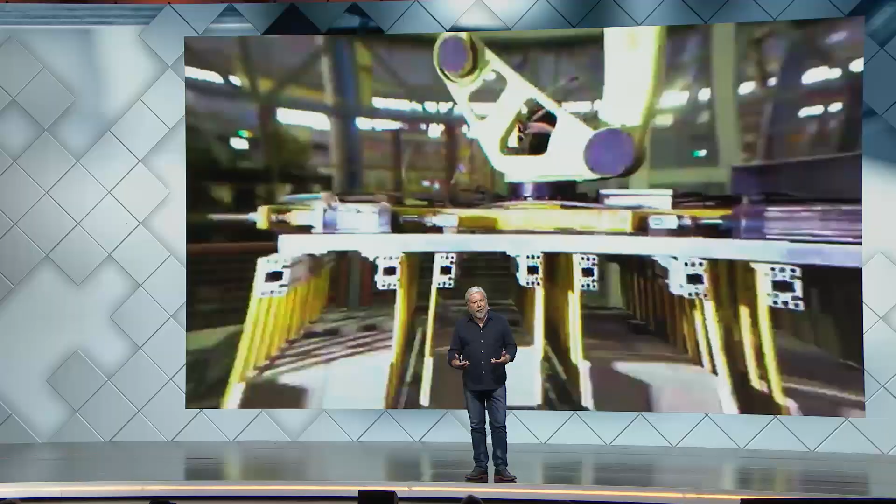Okay, let's talk about augmented manufacturing. What I want to tell you is that we have an incredible place in Ventura called XponentialWorks, where we are actually making the future of manufacturing through investments in next generation robotics, AI, and additive manufacturing. We just took the advice from Peter that the best way to predict the future is to try and make it. So we're putting our own experience and financial resources to work trying to make a difference. We'll talk about that a little bit.

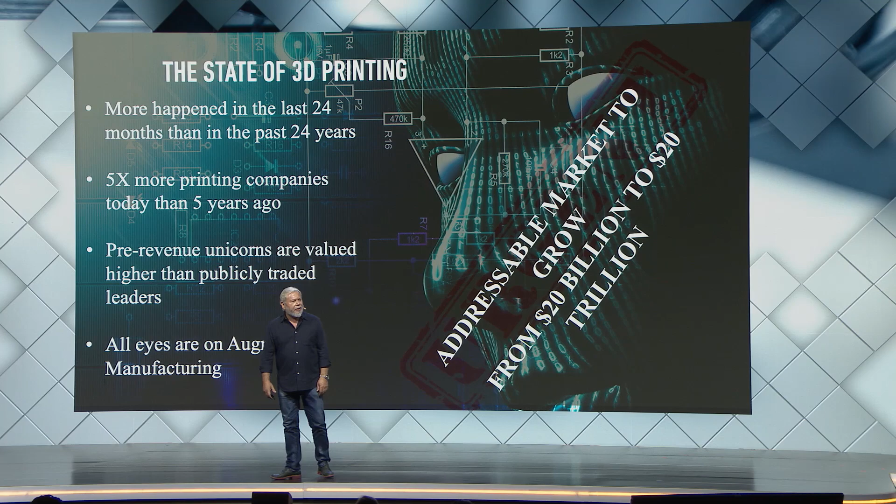But what's the big deal about augmented manufacturing? After all, 3D printing has been around for 4 decades. You know, it's not an overnight success. It's been around for a long time. But in fact, more has happened in this space in the last 24 months than in the last 24 years.

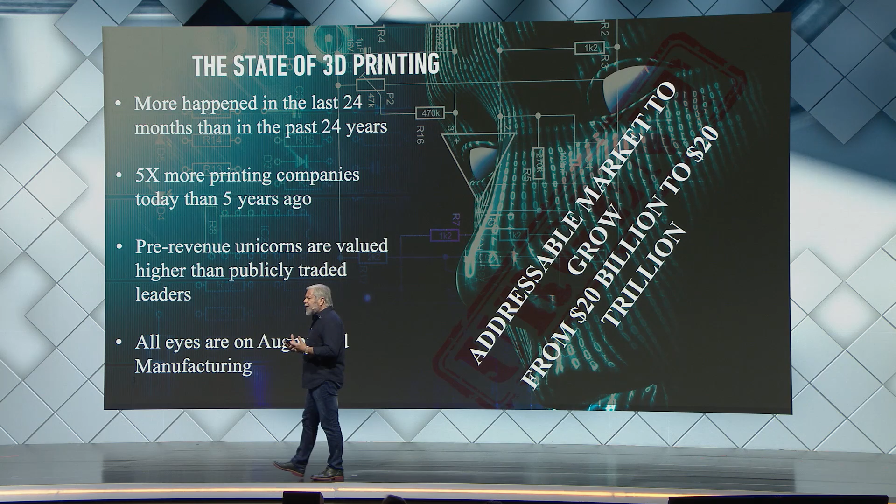There are 5 times more 3D printing companies today than 5 years ago. And there is a very interesting phenomenon: while the publicly traded companies in this space, my former company included, are rising in valuations at the moment, reflecting a recovery and accelerated adoption in manufacturing, if you look at the cumulative valuation of the early stage, pre-revenue, and modest revenue companies, cumulatively they boast a higher valuation than all the public companies combined.

Why is that? The answer is that all eyes are on real manufacturing, what I call augmented manufacturing, in many different fields. And because the size of the prize, the TAM, the total addressable market, is poised to increase from about 20 billion of actual revenue in the next 2 years to a TAM of about 20 trillion, which represents all the opportunities in manufacturing, in personalized healthcare, and other industries that we'll talk about.

So when we think about what augmented manufacturing is today, we think first and foremost about the input, which has undergone a significant disruptive transformation, and that's design. We're in a stage in which we're going from design to generative design, computer-generated design. 3D printing has been disrupted entirely in the last few years, and we'll talk about some of the core movements and their impact.

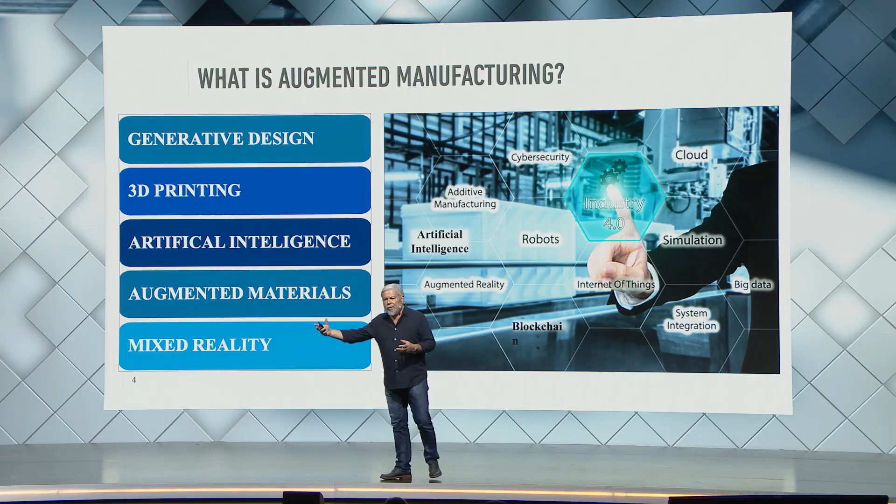Artificial intelligence, of course, and its applications from design to manufacturing, digital twinning, and quality play a big part here. And the mixed reality of design guidance, but also maintenance, repair, intelligent service, all coming into play. And as Peter loves to say, the convergence of this technology creates new possibilities. Make no mistake about it, in the next decade, fortunes will be made and lost with this technology, and not necessarily just by the companies that are commercializing, demonetizing, and democratizing, but by all the businesses that will be created, transformed, disrupted, and fail.

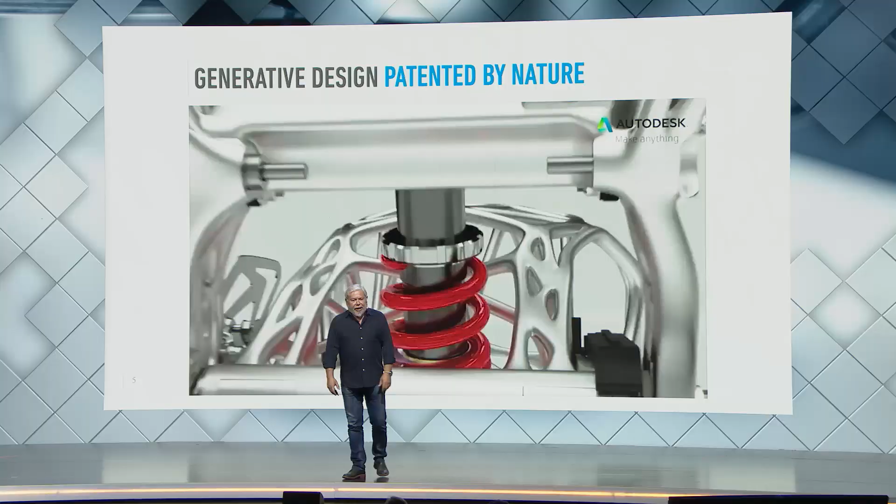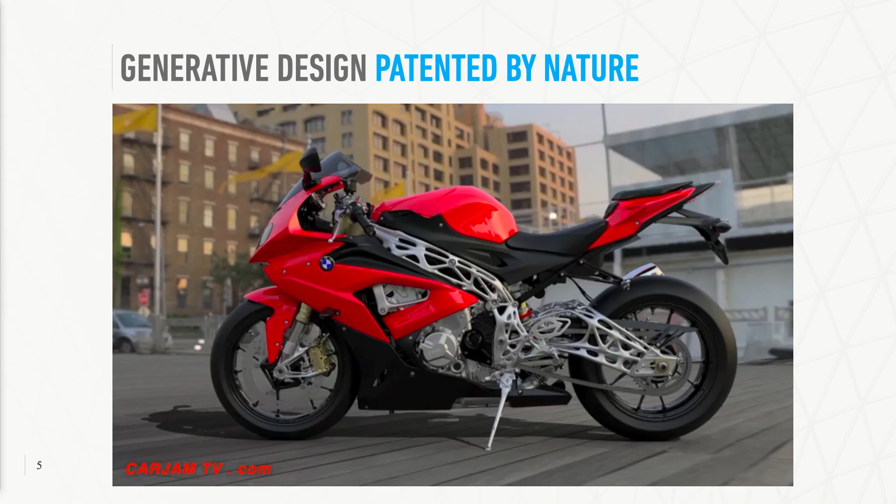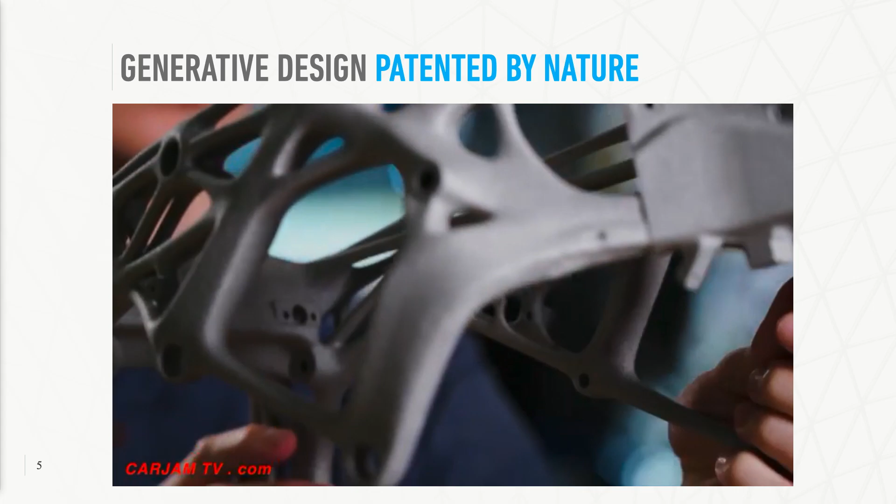Let's start with generative design, one of the most exciting developments with infinite computing in the cloud and ubiquitous connectivity. Computers can design. When computers can design, they can use algorithms taken from nature's playbook, because the most interesting structures in the world were already patented by nature. When you can lightweight, you can save money, increase sustainability, consume less energy, be more efficient, and increase function.

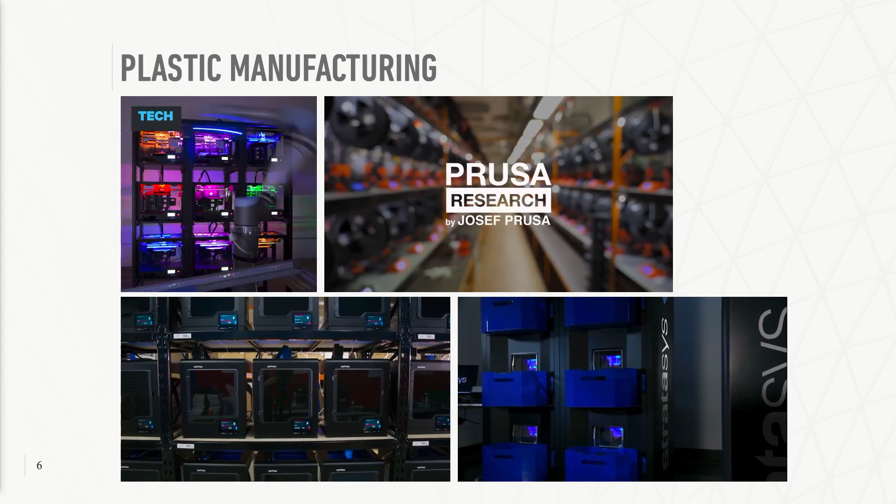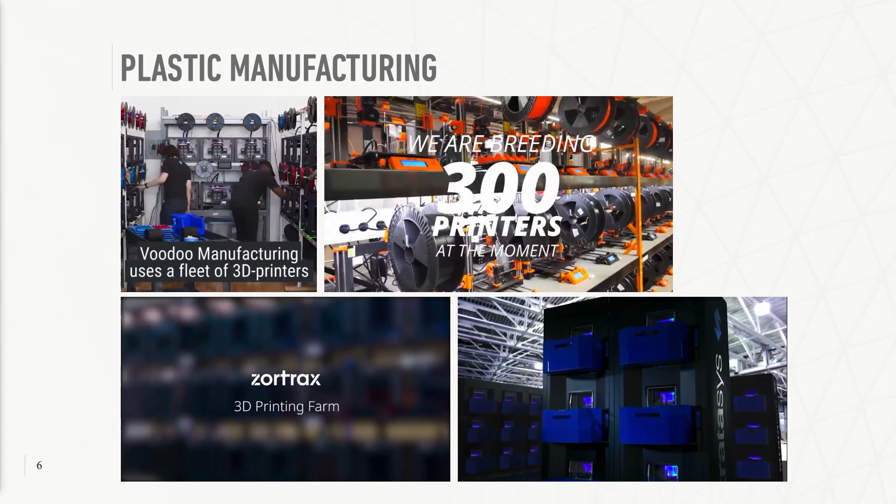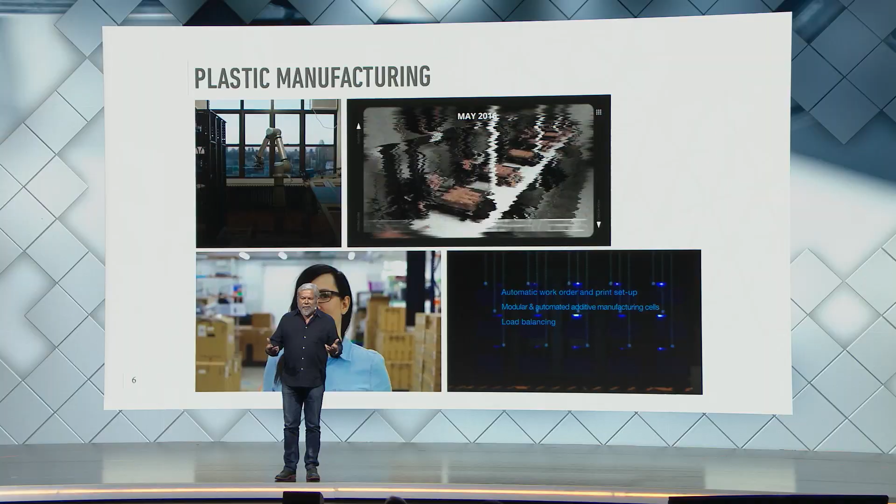The manufacturing side of it has some interesting applications and some limitations, okay? The interesting applications are taking really inexpensive plastic 3D printers and putting them into banks to create instant, low-volume, completely flexible manufacturing. It's good as far as it goes, and it can get you to some small enterprise manufacturing, but it's not really a scalable or reliable solution.

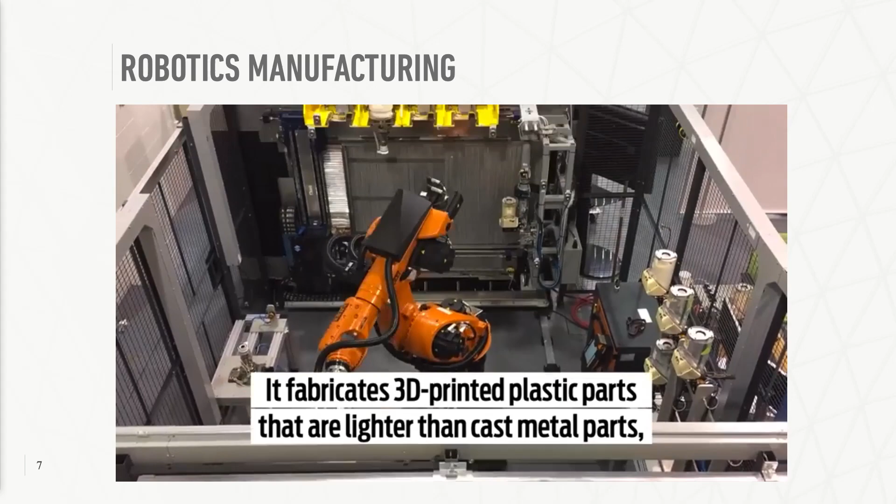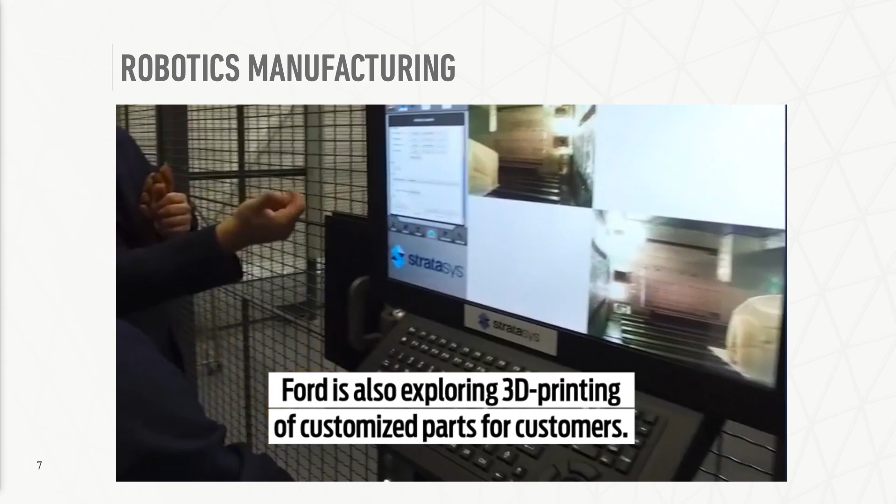Some companies are integrating robotics. You heard from my good friend Rob Nail that robotics are becoming ubiquitous and inexpensive. You can see a nice reduction to practice here of companies integrating robotics to build bigger size parts, used for spare parts or for exotic automobiles. It's an interesting niche, and it has its limitations.

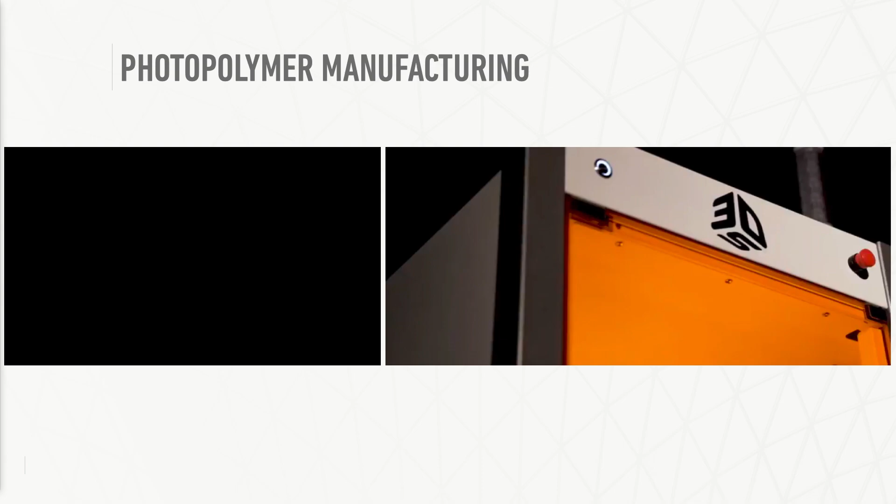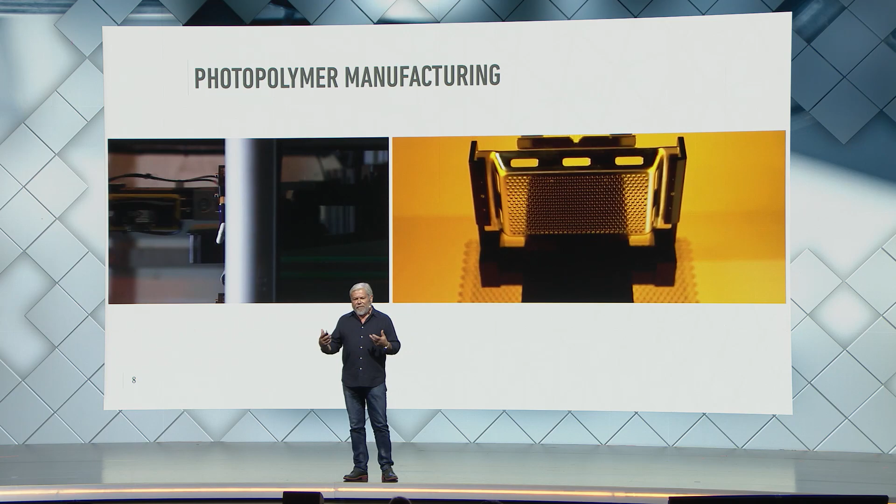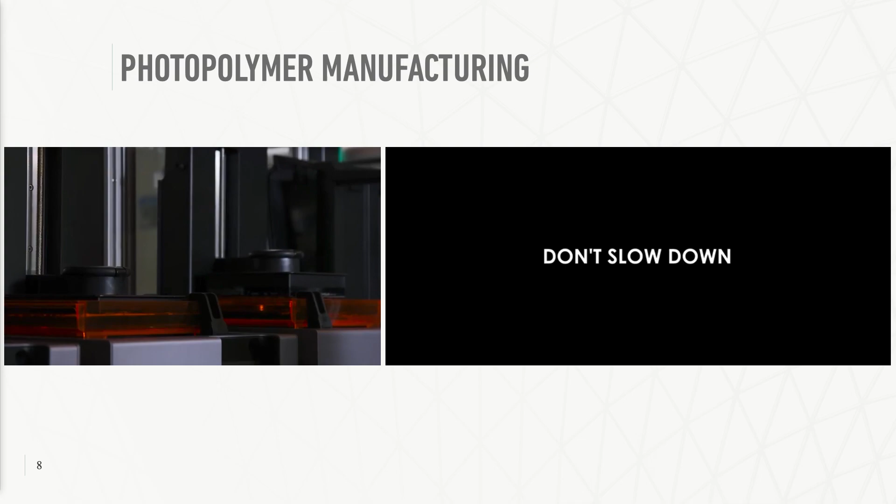One of the kind of killer apps that are coming is the use of digital materials and new chemistries in what's called faster continuous building. You can see some examples here from my former company, 3D Systems, and from another very successful unicorn, Formlabs, where they are integrating robotics with photo-curable materials to make plastic parts.

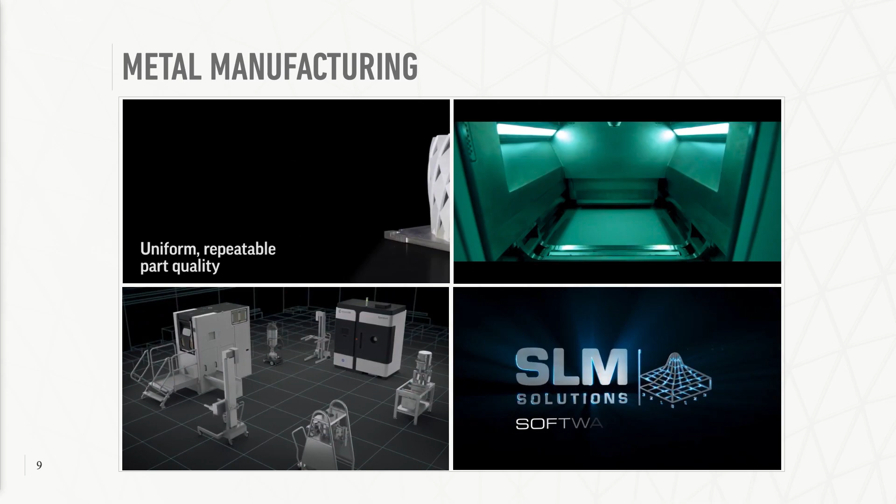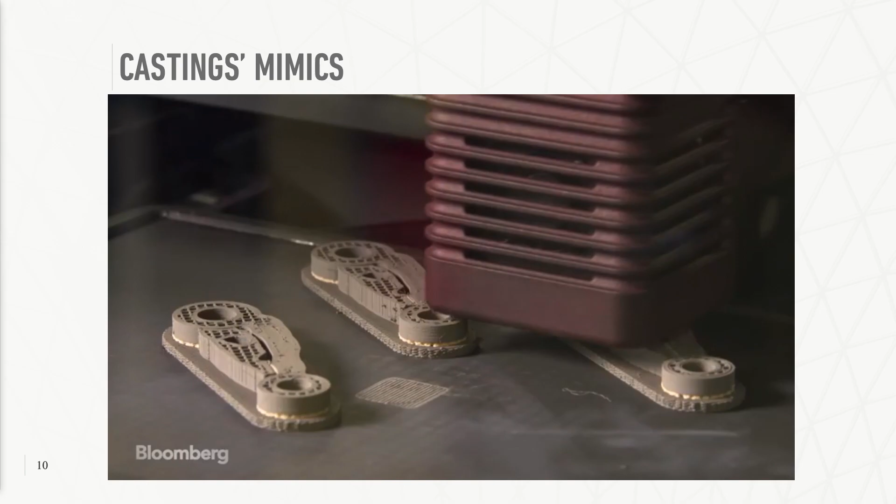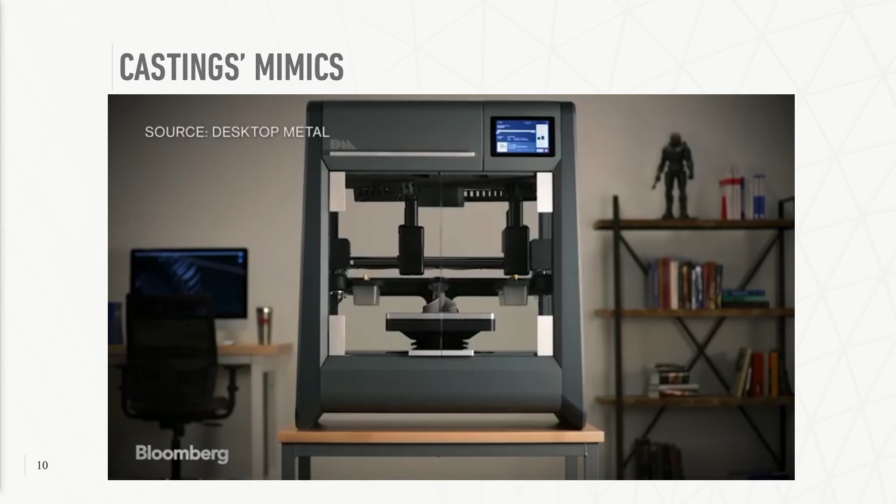Metal is the hottest space here because with metal you can laser melt real alloys and make real metal parts. There has been more investment and more deployment in automotive and aerospace in the last 2 years than in the last 20 years. And there are even interesting casting mimics in which you can use binder to bind together metal powders and then sinter them. And that could be used to begin to replace and displace castings.

And that's another interesting unicorn that Ric Fulop is running called Desktop Metal that already raised in excess of $300 million and is worth probably nearly $2 billion today as largely a pre-revenue company. There are interesting companies that are taking what Ric Fulop is doing to the next level. This is an Israeli company that is actually claiming that they can jet liquid metals and ceramics, which means they can get to higher resolutions and accuracies.

And with all the capabilities in making metal and plastic parts, what about electronics? What about making the parts functional and smart? We're going to have about 50 billion connected devices on the market in the next couple of years. They will all require antennas and sensors and encapsulation, and companies like Nano Dimension are solving for that problem.

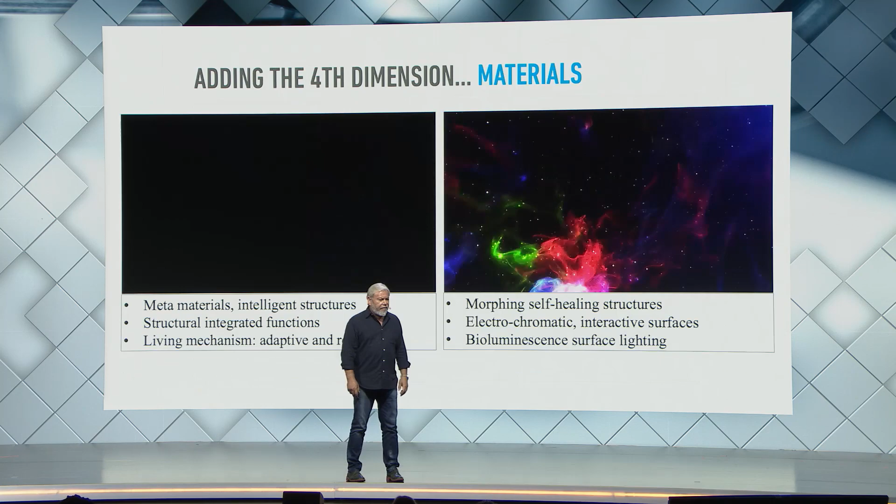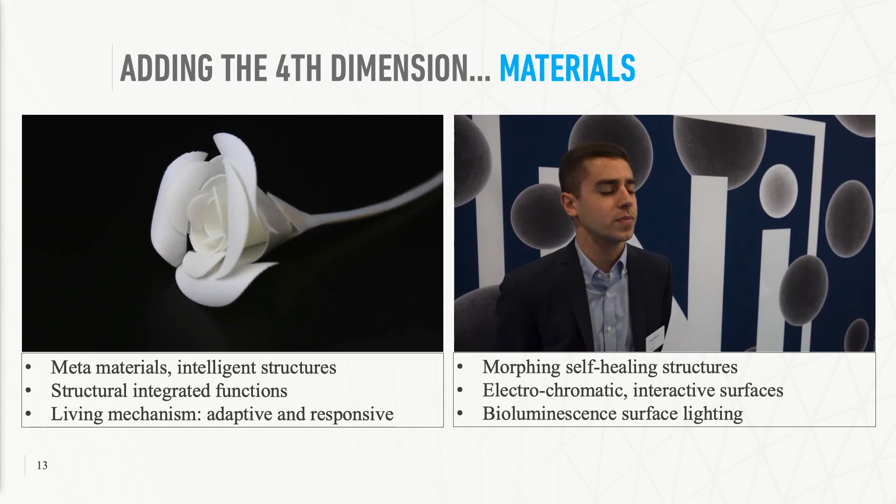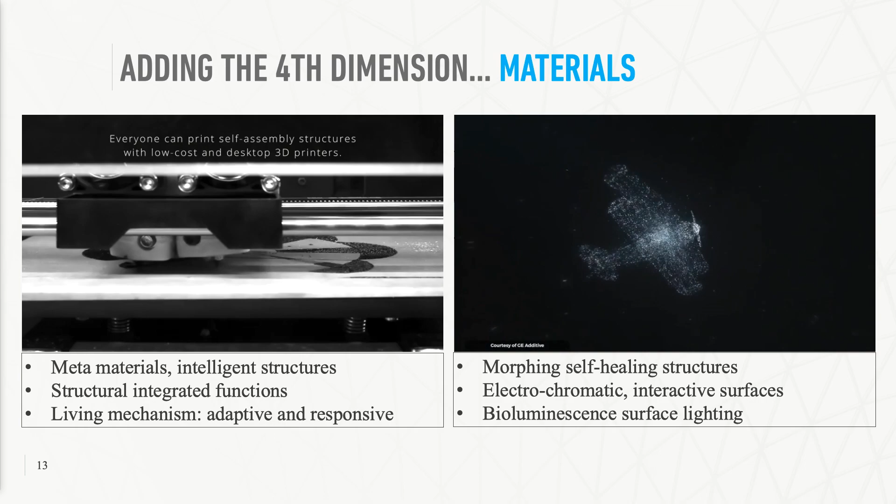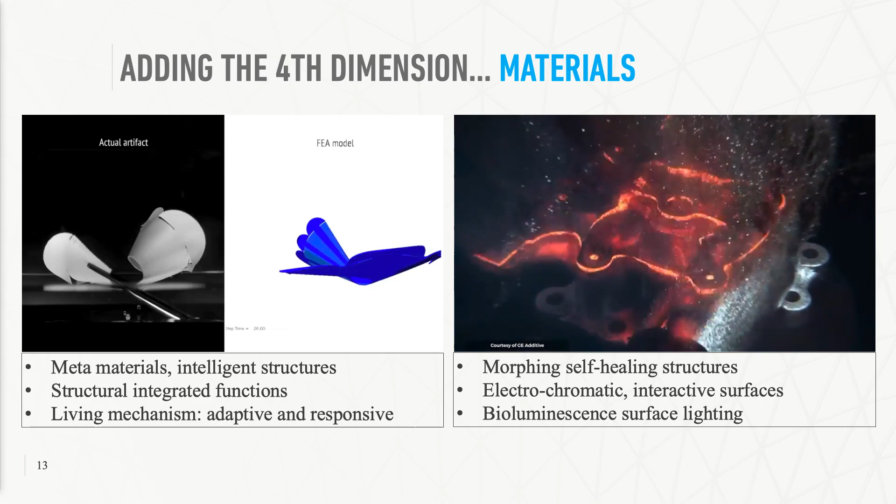And finally, we have the whole material science side of it, which is exploding in terms of functionality. We can already print today with metamaterials, with intelligent structures. We see a line of sight to self-healing and self-compiling or self-assembly of materials using 4D printing. And of course, there is a whole field of electrochromatic and interactive surfaces, which will completely redefine how products are made and designed.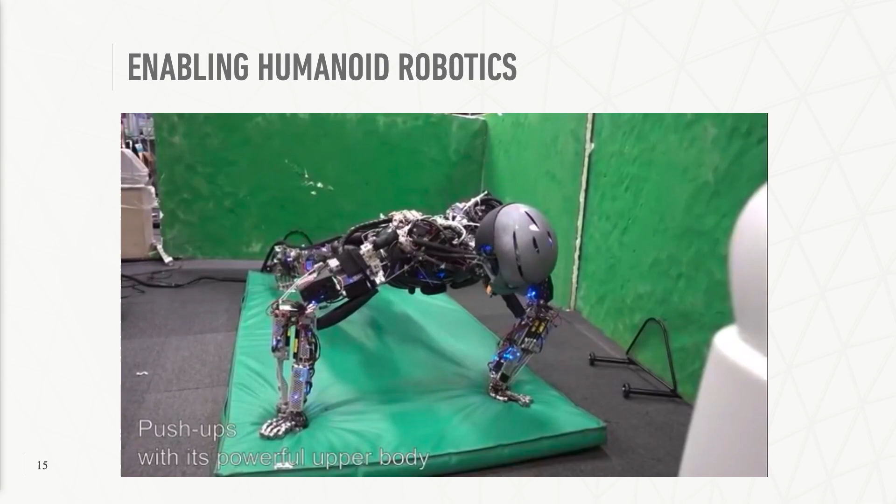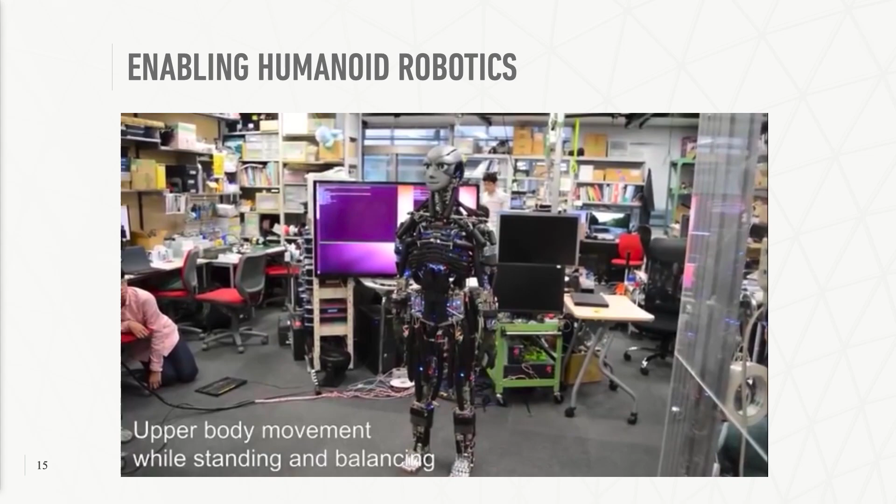So what's ahead? What's coming? What's in front of us? First and foremost, in the next 5 to 10 years, we will be printing convincingly not only robotic mimics, but we will print organs, and we will print bones, and we will have the spare parts to go with the kind of longevity that Bob Hariri is promising. And you can see the beginning of how materials and robotics are coming together to give us a humanoid-like functionality in ways that truly mimics the gestures, the utility, and the functionality.

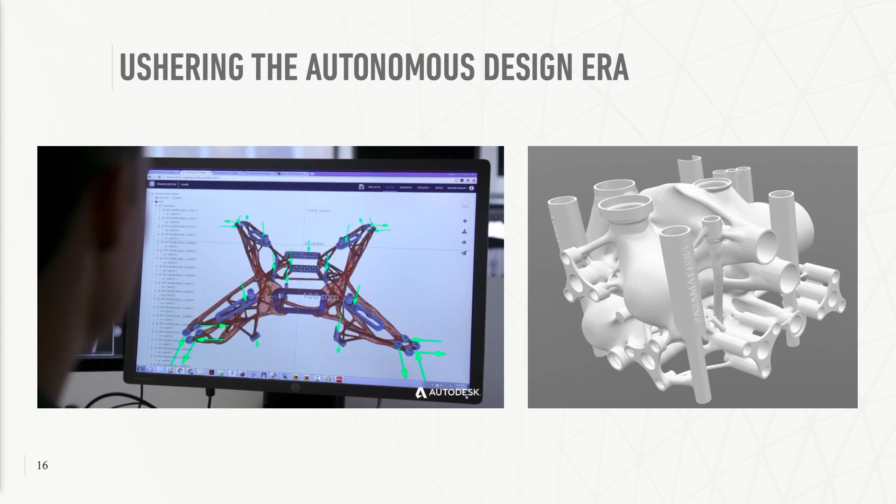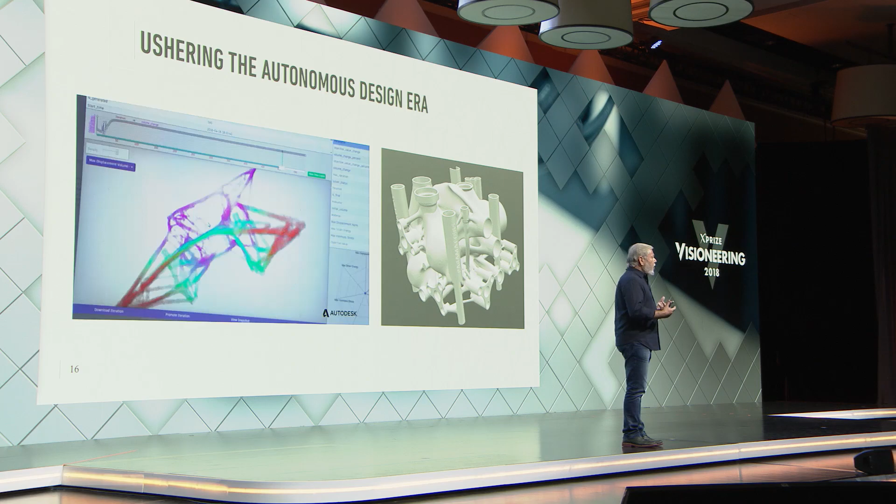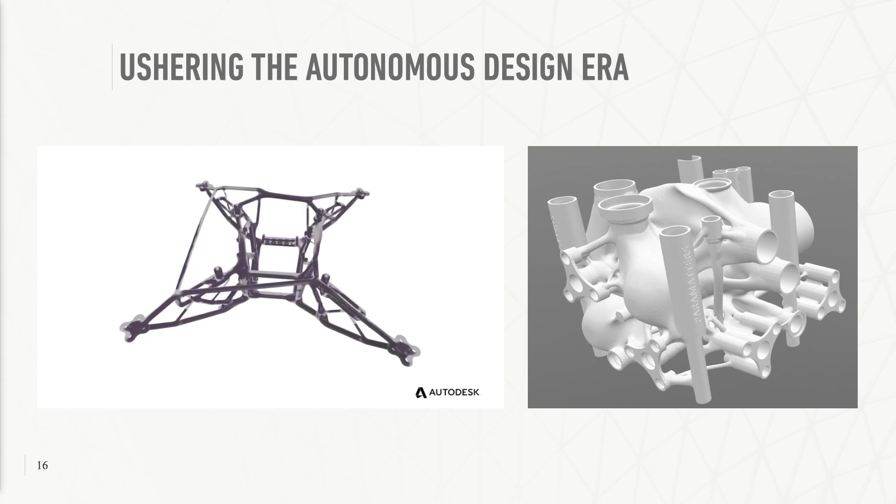The biggest breakthrough to me is the era of the autonomous designer. We now have interfaces in our labs in which I can talk to a computer. She is my personal designer, my AI designer, and I can change and morph parts, optimize them, and lightweight them in real time.

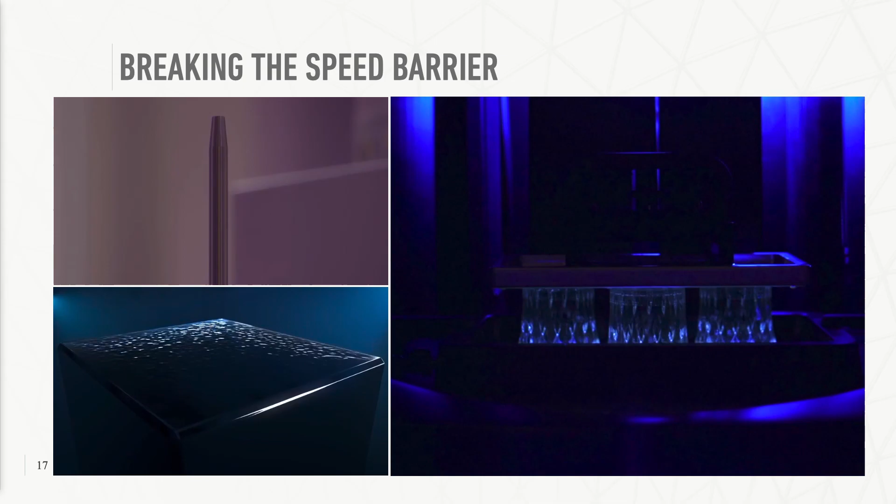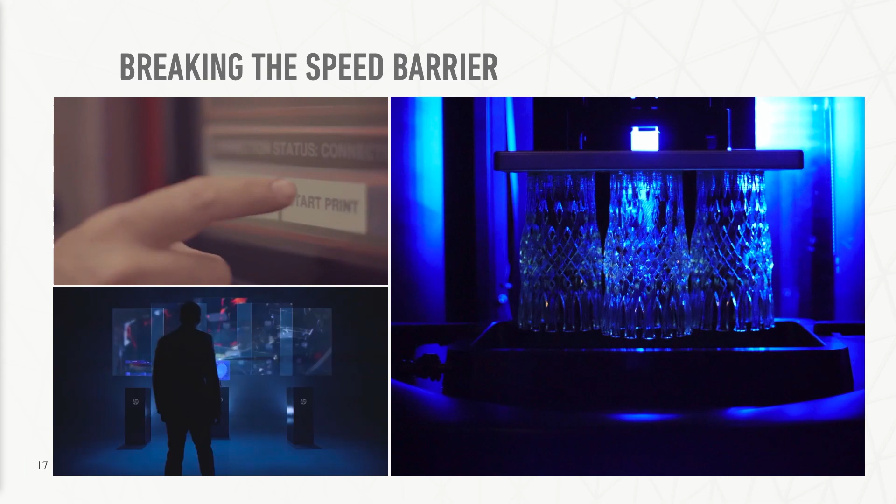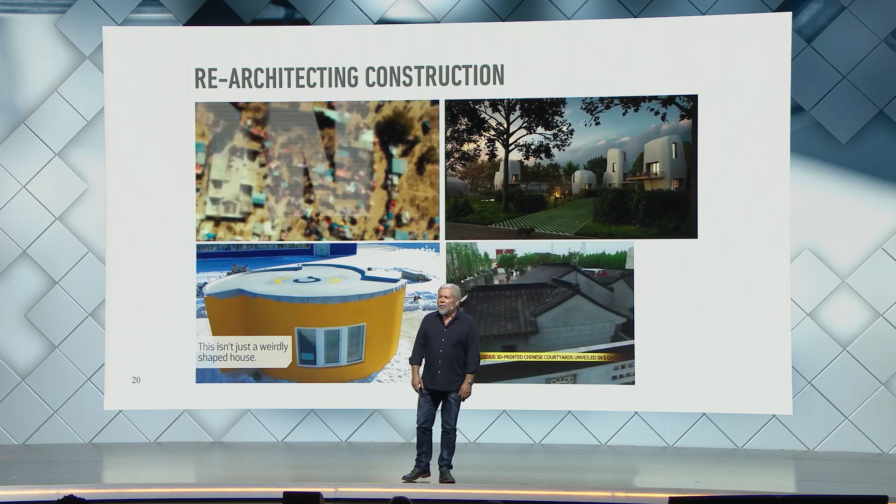Supply chain will be interrupted because Peter is talking about replicating. I think about teleporting. When you can teleport matter, it has no borders. So UPS and FedEx, watch out. Trump, rethink your trade war strategy because there are no borders to cross here. Architecture and construction will be reimagined.

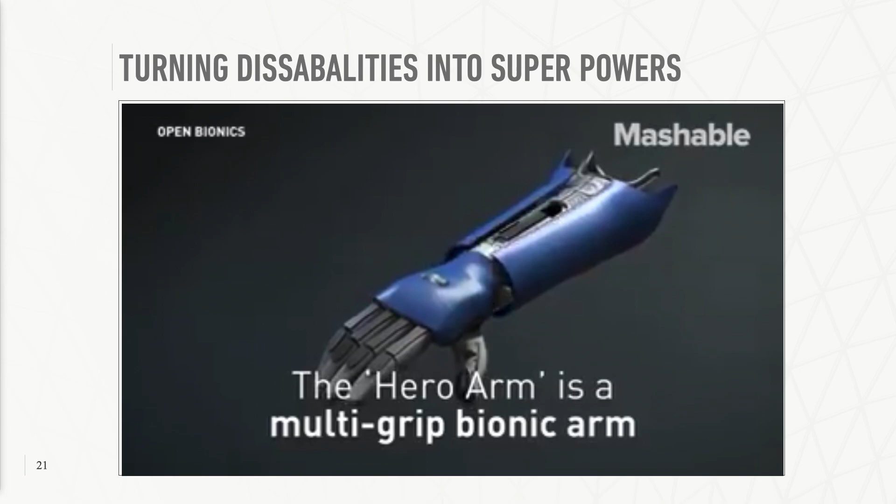Disabilities will turn into superpowers through the combination of AI, sensing, and robotics in a way that will be so powerful and so compelling that some fully functional and able people might want to augment and enhance their functionality.

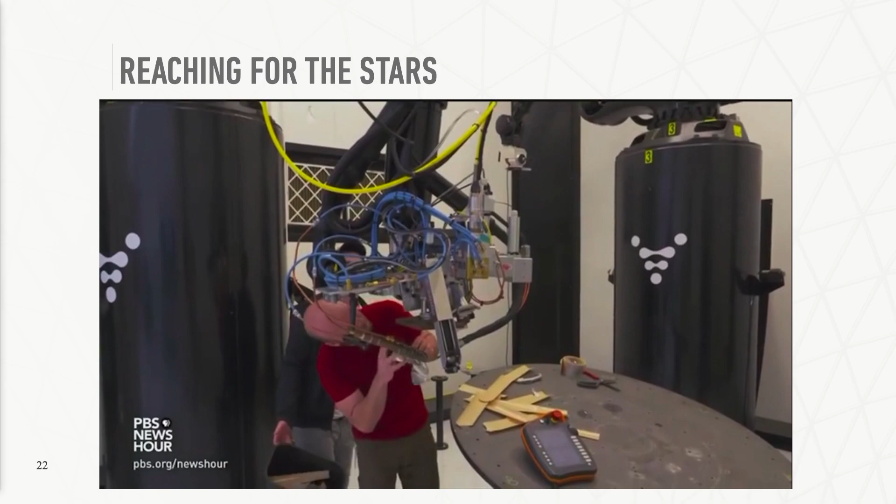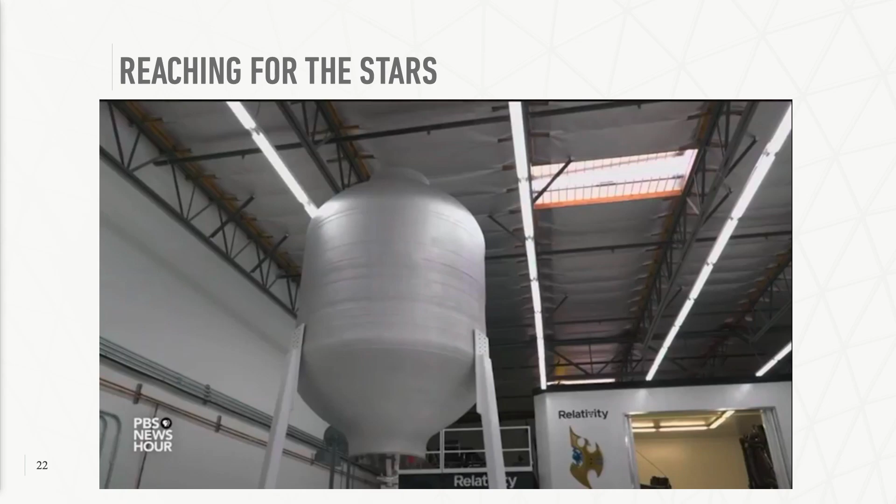And down the road here by LAX, there is a new company called Relativity that is building rockets to deploy satellites into space by combining thousands of parts into few and by 3D printing the entire engine, rocket, and fuel tank. They've already had 85 successful trials.

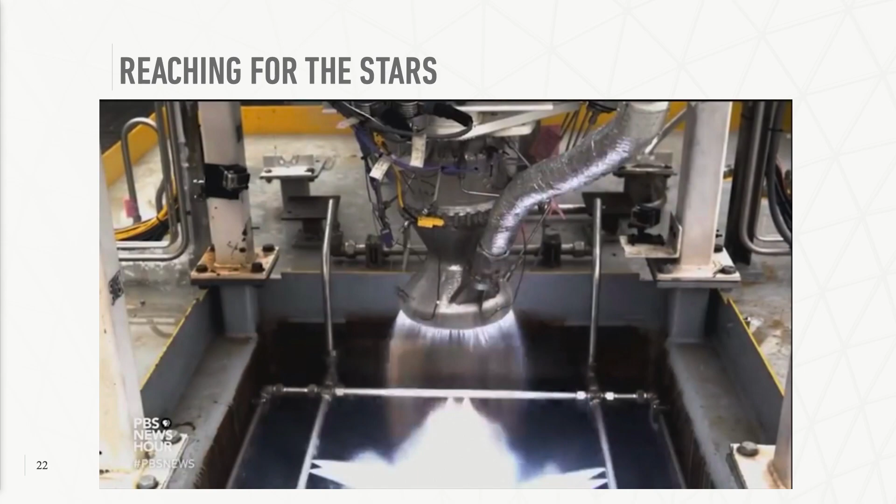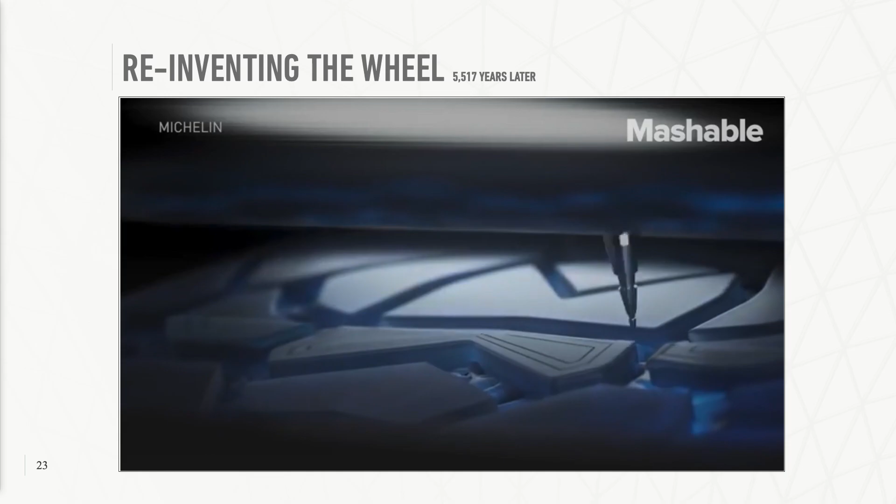And yes, my fellow Visioneers, after some 5,500 years, even the wheel is being reinvented. Every tire company around the world is racing to take a page out of nature's playbook and completely reinvent the wheel. So I'm going to leave you with this. There has never been a more exciting time to be in 3D printing. This is now. It's here. It's going to be huge, except maybe for next year.

Thank you very much. Every time I hear you, and every time I see you, besides just... Do you like our fashion consultant? I'm blown away by the potential.

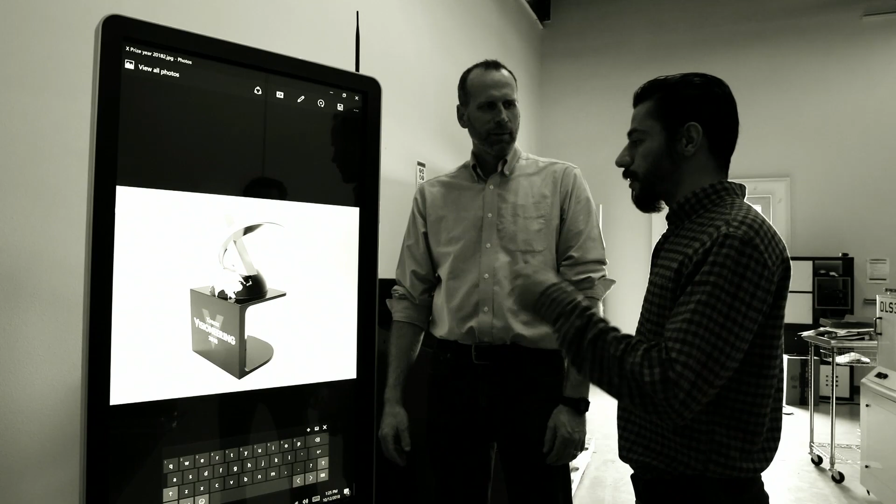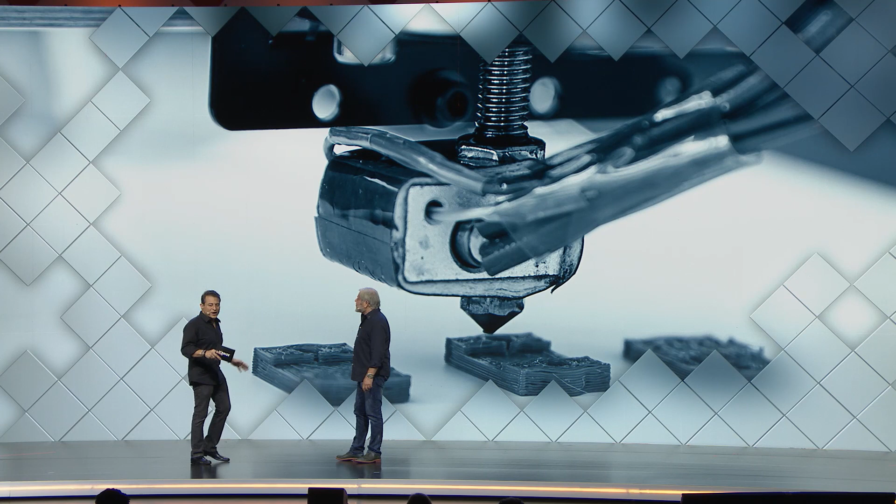Right, this is 3D printing going down in detail and molecular assembly coming up, and they'll meet sometime soon. So let's roll a video right now. And one of the things that we asked you to do was to create our trophies for Friday and Saturday night. Can you tell us what we got here? Yes, Peter always asks the impossible, make me trophies. We ran a competition actually through HeroX. Yeah, we did. We printed the winner on a metal printer, and it's being rushed here as we speak. I think we're going to take delivery in about 5 minutes. All right, perfect. You'll see the final product tomorrow night and Saturday night.

But Avi, more important than that, you have an announcement to make, which is very substantial. You just told me about it a few days ago, and I said, let's announce it. Could you please tell us what you've amazingly donated? I mean, here's the deal, Peter. You keep coming to me all the time, and you're asking for my help. And I decided to make it easy on you. XponentialWorks will give you and the XPrize organization and every team now and in the future free printing services for as long as I live, any team, at any price, at any cost, until we crack the code and deliver abundance. Amazing.

I just want to reiterate what I heard, which was your company XponentialWorks is going to, if a team registers for an XPrize, and in building that XPrize they need 3D printing services, you're going to donate that. Even if it costs millions of dollars, we will donate it free of charge. Amazing. For as long as I live. For as long as you live, which I'm working on.

Ladies and gentlemen, Avi Reichental and XponentialWorks. Thanks, guys. Thank you, buddy. Thank you, brother.